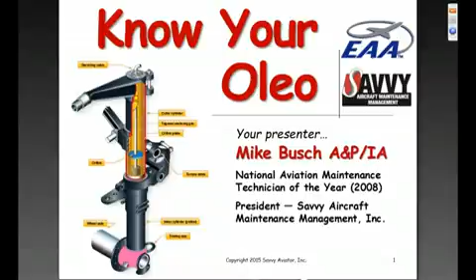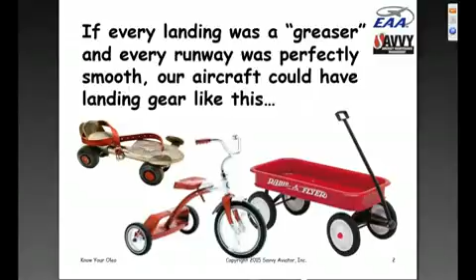So anyway, what we're going to be talking about tonight is landing gear. And if every one of our landings was a greaser that just barely kissed the runway, and if every runway that we landed on was billiard table smooth, then landing gear would be really simple. Our aircraft could have landing gear like a little red wagon, a pair of roller skates, or a tricycle. But in the real world runways aren't always pool table smooth, and some of our landings are a bit on the firm side.

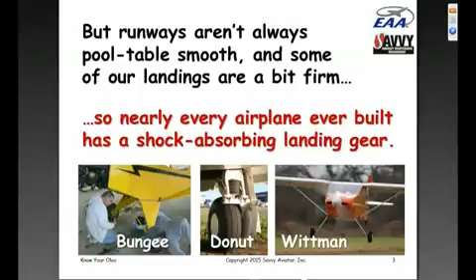So nearly every airplane ever built has a shock-absorbing landing gear of some kind or another, and there are a number of different designs for shock-absorbing landing gears for airplanes. Lightweight airplanes often can get away with a simple bungee cord shock absorber like this J3 Cub, where it's got landing gear legs that hinge and elastic shock cords to absorb the impact of landing. Very simple scheme, and it works pretty well for very small, very light aircraft.

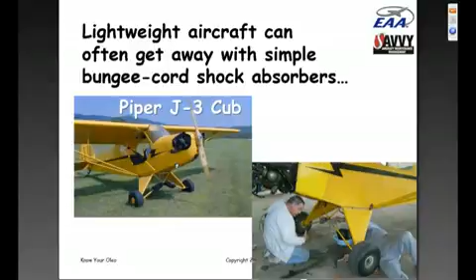Getting a little bit bigger, where the bungee cords are pushing their limit, a number of aircraft including this Mooney - and actually the nose gear of some other aircraft like a Cirrus - use a stack of rubber donuts to perform pretty much the same function that the bungee cords do. Again, it's a spring that absorbs landing impact.

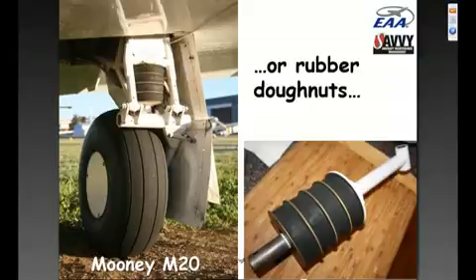Another design is the Wittman gear that was developed by air racer Steve Wittman, well known to all EAA members. It was developed by him in the 1930s and actually licensed by Cessna. Wittman patented this gear design, and Cessna licensed it in the 40s, and has basically used Wittman spring steel gear legs on pretty much every single engine airplane they've ever built, if we don't include the new Cessna 400, which is really a Columbia with a Cessna logo on it.

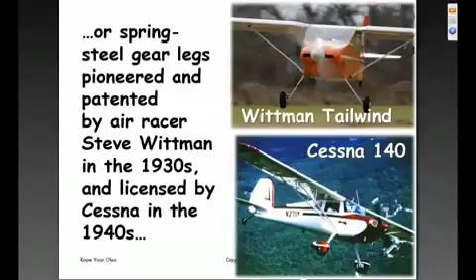At any rate, this is a very simple landing gear design that is based on a spring, and in this case the landing gear leg itself is the spring that absorbs landing impact. And even if we look at a modern design aircraft like the Cirrus SR-22, the main gear of the SR-22 is basically a Wittman gear, except that the leg, instead of being made out of spring steel, is made out of composite. But the principle is exactly the same.

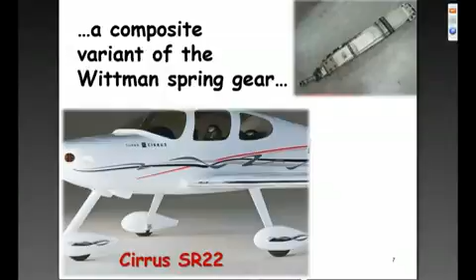Now all of these simple springy gear designs, if I can call them that, have some compelling advantages. They're cheap, they're lightweight, they don't have very many parts, and for all intents and purposes they're maintenance-free. Not completely - the bungee-style gears occasionally need the bungee cords replaced, rubber donut gears occasionally have the donuts replaced - but the Wittman gear pretty much is totally maintenance-free.

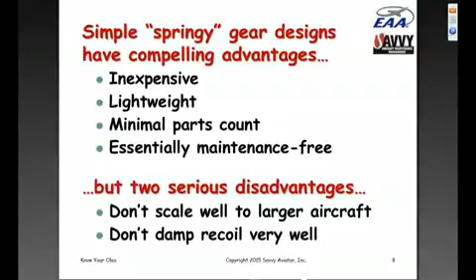But these springy gear designs have two serious disadvantages. First of all, they don't scale well to larger aircraft - if the aircraft gets big enough, the size of the springs needed to absorb the landing impact gets impractically large and heavy. Second, and probably most important, springy gears are springy - they don't damp recoil very well. So with a springy gear design, the harder the landing, the more energy the gear spring absorbs, and the more energetic the recoil. The result is that unless you make a nice smooth landing with a springy gear, you're likely to bounce right back up into the air.

And we know what happens when that happens. At best we have a multiple landing attempt on a single roll, and frequently we wind up with pilot-induced oscillations that sometimes can cause loss of control or damage to the aircraft.

An example of this, if you want to look way back, is the New York to Paris Ryan airplane that Charles Lindbergh flew. This airplane was a Ryan M2 mail plane modified so it could lift 450 gallons of fuel and have a maximum gross takeoff weight of 5,250 pounds, about twice what the normal Ryan M2 mail plane could handle.

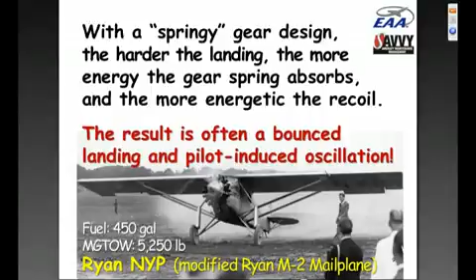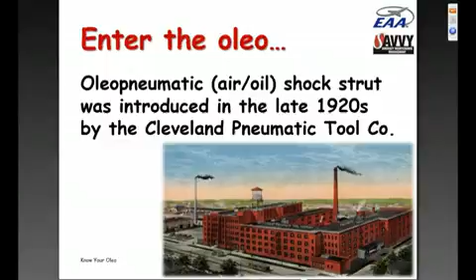The solution to this problem was introduced in the late 20s by a company called the Cleveland Pneumatic Tool Company, a company that nowadays is Cleveland Wheel and Brake. What they introduced is what was called the Oleo pneumatic, or air oil shock strut. They introduced it under the trade name Aerol, which I guess is short for air and oil.

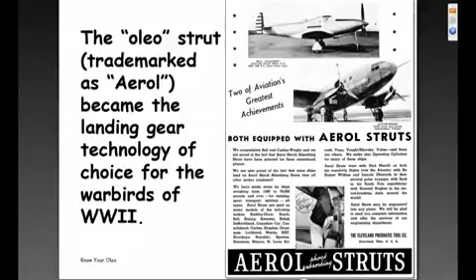It had significant advantages over these simple spring-style gears and quickly caught on during the 30s, and by the time the 40s came around and we got into the business of building all these warbirds, the Oleo pneumatic strut, or Oleo for short, became the landing gear design of choice for the warbirds of World War II. It's been used ever since on airplanes of all sorts of different sizes.

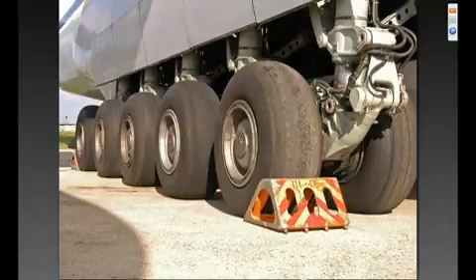At any rate, let's talk about how these Oleos work, because they're actually pretty clever in design. The basic idea is that instead of a mechanical spring or elastomeric spring, the Oleo uses compressed gas as its spring. It basically consists of a pair of telescoping tubes that create a variable displacement cylinder and are partially filled with hydraulic fluid and partially filled with gas, typically either compressed air or compressed nitrogen.

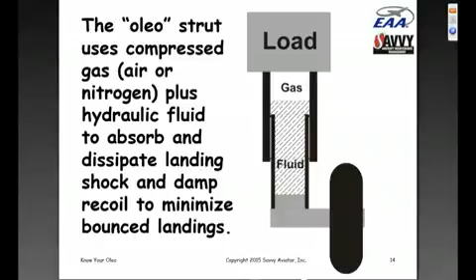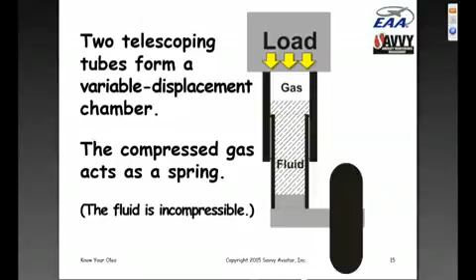These two telescoping tubes create a variable displacement chamber where the gas is acting as a spring. The fluid is incompressible. So as the strut during landing goes from fully extended to fully compressed, the volume of the fluid stays the same, but the volume of the gas gets less and less, and the pressure of the gas gets higher and higher. So essentially you're compressing this gaseous spring.

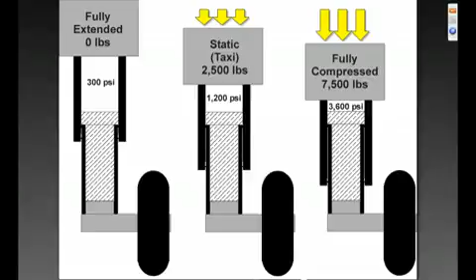So anyway, keep in mind that we're going to be looking at the state of this strut in these three positions: fully extended, where there's no weight on the wheels; static weight, which is basically the weight of the aircraft on the wheel, just as if you were taxiing around; and fully compressed, which is what happens on impact on a hard landing—the maximum weight that the strut is designed to carry.

So we talked about how the function of the air, or the nitrogen gas part of the strut, is basically a spring. But the secret of the Oleo is in the oil part, the hydraulic fluid. The purpose of the fluid in the strut is to damp the action of the spring, slow the rate at which the strut absorbs landing shock, and reduce post-impact recoil. By damping the action of the strut, something simple spring landing gear designs can't do, the Oleo minimizes the chance of a bounced landing.

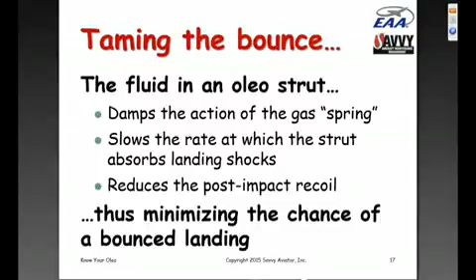Now, in order to do this, the Oleo has a fairly clever design. In the fluid chamber, there is an orifice plate, basically a disc with a calibrated hole in the middle. When the strut compresses, the fluid in the lower part of the strut is forced to move through this orifice into the upper part above the orifice plate. Conversely, when the strut extends again, the fluid is forced to go the other way, down through the orifice into the lower part of the strut.

And the size of that orifice controls how much damping there is in the action of the strut. The smaller the orifice through which the fluid has to pass, the stiffer the strut and the more reluctant it is to move.

Now, inside the hole in the orifice plate is a tapered metering pin whose diameter continuously changes, so that the pin is skinny and the orifice is large when the strut is fully extended. As the strut compresses and the metering pin moves further through the orifice plate, the size of the resulting orifice gets smaller and smaller, restricting the motion of the fluid more and more, until with the strut fully compressed, the orifice is essentially almost all the way shut.

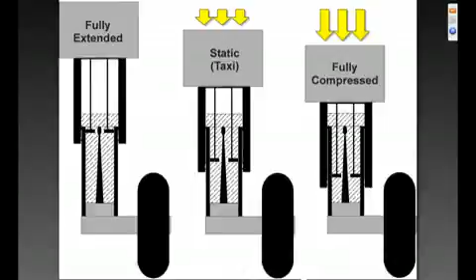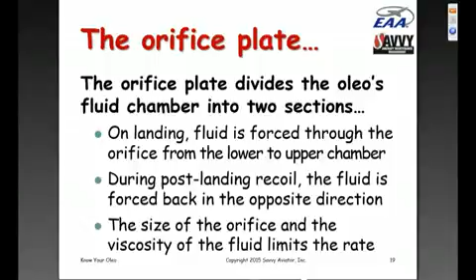So the orifice plate divides the Oleo's fluid chamber into two sections. On landing, the fluid is forced from the lower section up through the orifice to the upper section. During recoil, the fluid is forced back in the opposite direction. And the smaller the orifice, the stiffer the strut and the greater the action of the strut is damped.

Okay, so I think we've gone over all of this. What happens is that when you come in for a landing and you start off with a fully extended strut, the metering pin is skinny, the orifice is pretty big, and so the strut starts off very soft. Then as the strut compresses more and more, and a larger diameter portion of the metering pin is in the orifice, the strut gets increasingly stiff and damps the action more and more.

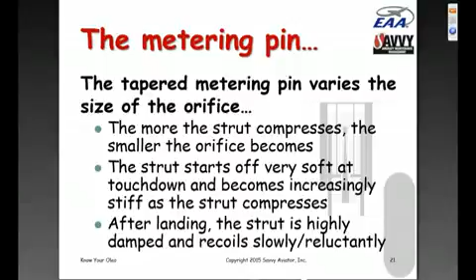And then if the landing is hard and the strut wants to recoil, in its compressed state it's highly damped, so the recoil is very slow. As the strut extends again, it gets less and less stiff. So it's really a pretty clever system.

Now, let's talk about how one would design an Oleo. It's kind of interesting, and it helps you understand the principles involved. Some of you may be home builders who might be interested in designing an Oleo. Most of you probably aren't — you either have an airplane with one of these struts, or you'd buy a commercial one and leave the design to somebody else. But it's interesting to go through the basic guidelines of how you'd design one, because it helps you understand how they work a little better.

So let's take, for example, the main struts for my airplane, a Cessna 310, which weighs about 5,500 pounds maximum gross takeoff weight, just a little heavier than Lindbergh's airplane. Because the airplane is 5,500 pounds and it's a tricycle gear airplane, each main strut needs to support a little less than half the weight, roughly 2,500 pounds, with the nose gear supporting about 500 pounds, and the remaining 5,000 pounds split between the two mains. So each main needs to support about 2,500 pounds — that's with the airplane static, just sitting on its wheels or taxiing around.

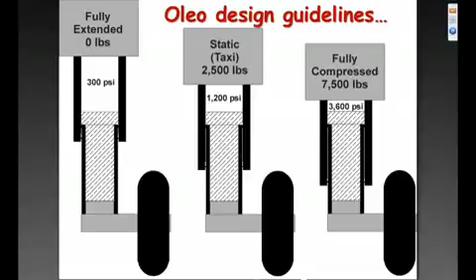This particular design I'm showing you here, the strut on my Cessna 310, clearly meets all those constraints. The minimum pressure is well over 50 or 60 psi. The maximum pressure is well under 6,000. And the static pressure is well under 1,800. So it meets all of those design criteria.

The main gear strut on my Cessna 310, when the airplane's up on jacks or when it's flying, extends to about 12 inches in length. So if there's a 4-to-1 compression ratio, which is our design goal going from unloaded to static, then the strut should compress to about 3 inches when the airplane's weight is on the wheels.

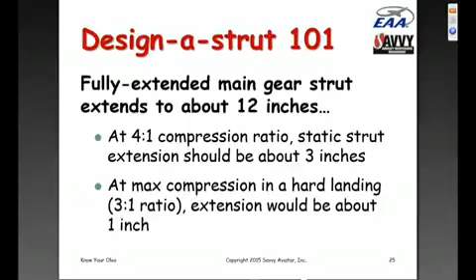And under a maximal hard landing, where the compression ratio is another 3-to-1 from static to maximum compression, the strut would compress all the way down to about 1 inch at the maximum impact it would handle in a maximally hard landing, which is a 3G impact, a 600 foot per minute descent right into the runway.

Nose gear handles much less weight. It has a shorter throw, much lower working pressures. In my airplane, the max nose strut extension is only about 6 inches, about half as long as the main struts. The unloaded pressure is right down at the minimum, about 50 psi. Static pressure is about 200 psi, and the strut at 200 psi is extended to about 1.5 inches, about a 4-to-1 ratio again.

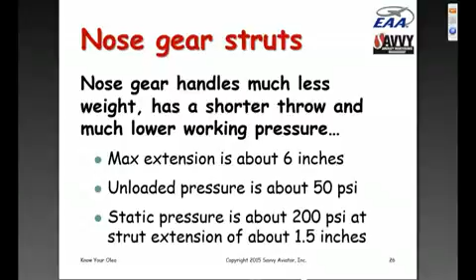But although the nose gear handles a lot less weight and is much less beefy, its ability to damp recoil is even more important, because in a tricycle gear airplane, the recoil of the nose gear is really a bad thing.

If you land the airplane hard and the nose gear recoils, it pitches the nose up, increases the wing angle of attack, and makes the airplane want to go fly again. And of course, we know what happens when that happens: the airplane is back in the air. The pilot is trying to recover the botched landing, and this can easily lead to PIO, pitch divergences, that have frequently resulted in wrinkled firewalls and curled prop tips and other expensive things.

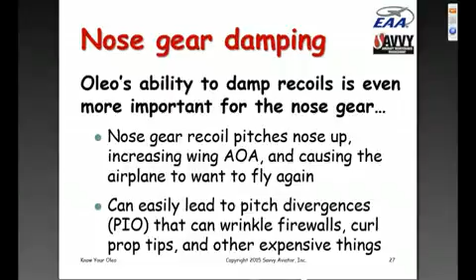So the ability to damp recoil on nose gears is particularly important, and that's why, for example, when Cessna designed its first tricycle gear single, which I guess was the 172, it decided, although it was going to use a simple spring Wittman-style gear for the main gear, it opted to use an Oleo for the nose gear, so that it would damp out the nose gear recoil. And Cessna has used that same design ever since, with a Wittman-style springy gear for the mains, but a nice, well-damped Oleo strut for the nose wheel to minimize botched landings.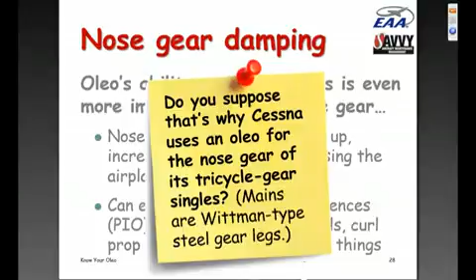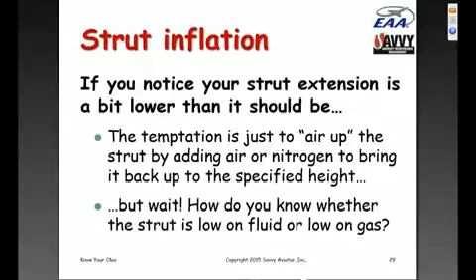Now let's talk a little bit about maintaining these things. Let's suppose you notice that your Oleo strut extension is a little lower than it's supposed to be. The temptation is to just air up the strut by adding air or nitrogen to bring it back up to the specified height. But before you do that, you want to think for a minute, because a strut that is low could be low either because it doesn't have enough gas pressure in it, or because it doesn't have enough fluid in it. So how do you know whether the strut is low on fluid or low on gas?

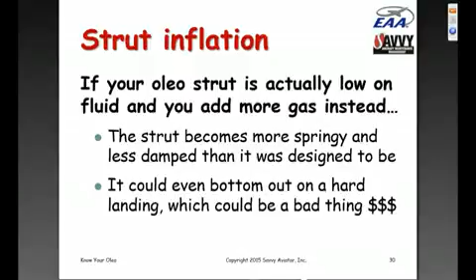If your strut is actually low on fluid, and instead you add more gas, basically you make the strut more springy and less damped than it was designed to be. And if you do that enough times, ultimately the strut could wind up just bottoming out on a hard landing, which would be a very bad thing. It could cause serious damage to the airplane. So we want to think about this a little bit.

How do you tell whether an Oleo strut that's low needs more air or more oil? Well, the quickest and dirtiest way to figure that out is to rock the airplane. If it's a main gear, rock the wingtip up and down. If it's the nose strut you're looking at, rock the prop up and down, and watch to see what the strut does. If the strut seems excessively bouncy, then it probably needs fluid, because remember, the purpose of the fluid is to damp the action of the strut and to prevent it from being bouncy. On the other hand, if the strut seems stiff and reasonably well damped when you try to bounce it up and down, then all it probably needs is some more air or nitrogen.

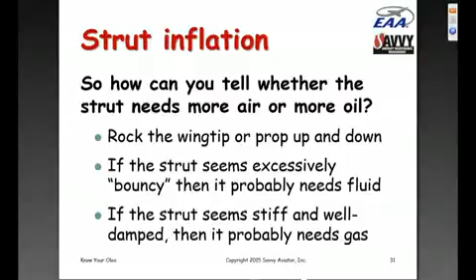So before you just blindly add gas to an Oleo strut, try the bounce test and verify in your mind whether the reason the strut is low is because it doesn't have enough gas in it or because it doesn't have enough fluid. Once again, the gas is the spring and the fluid is the damper. And if you understand that, it's usually pretty easy to figure out what the strut needs.

Finally, if your Oleo strut starts leaking fluid and you start seeing streaks of hydraulic fluid leaking out on the polished part of the strut, typically these struts use 5606 hydraulic fluid, which is sort of a red sticky stuff. Before you let a mechanic tear the strut apart to reseal it, try adding a bottle of some magic potion called Granville Strut Seal, which you can buy at Aircraft Spruce or other aircraft parts distributors. And Granville Strut Seal is something that's been around for, wow, many, many decades.

And it's a magic potion that you add to these struts that cause the seals, the O-rings and stuff, to soften and to swell a bit. And over a period of many decades, I've had an almost perfect batting average of fixing up leaky struts with Granville Strut Seal and not having to pull them apart and change the seals. If the Granville doesn't solve the problem, then you will have to have the strut disassembled and the seals replaced.

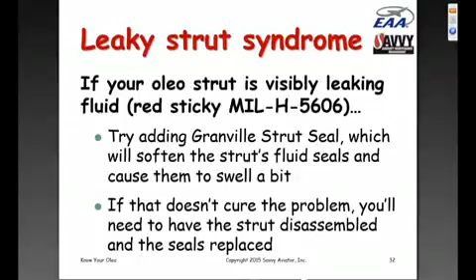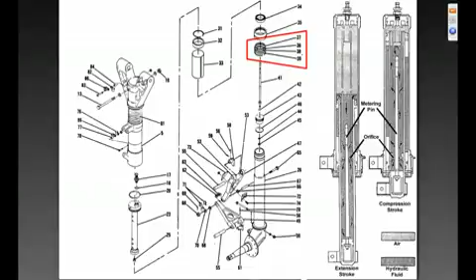Again, it's a few hours labor to reseal a strut, and before you do it, my recommendation is to try a little bit of this Granville Strut Seal. You simply let the gas out of the strut, put the Granville in through the filler valve, and then air the strut back up to its proper extension. I've had terrific luck with Granville Strut Seal eliminating strut leaks without having to disassemble the strut and replace all the seals.

Anyway, Tim, that's all the prepared stuff I have. We can open it up for questions if you like.

Okay Mike, great, thank you. Very interesting presentation, on a very geeky subject. Yeah, actually it was riveting though. I really liked it, it was good stuff. You don't often get to talk about this. You must rivet easily, Tim. What can I say? I'm easy.

Okay, let's get into our questions here. We got some questions that have already come in. DW just wanted to say that he has used the Granville strut seal, and he says it's a miracle in a bottle. Yes, it is, and there aren't many of those around, but it really works well.

So, question here from Gary. He's just wondering, do you put in nitrogen or air? Well, nitrogen is always better, both in Oleo struts and in tires and so on. Basically, nitrogen is just air with the oxygen removed, and because oxygen is corrosive, I mean it's the very definition of corrosive, it's always better to use nitrogen if you can.

Now, for large aircraft or really high performance airplanes like business jets and so on, or large aircraft over 12,500 pounds, typically they will specify specifically that you have to use nitrogen. And the reason is that for large or very high performance aircraft, the gas in the strut heats up so much during landing impact that if there was oxygen in the strut, there is a possibility that the hydraulic fluid could ignite. By using nitrogen and making sure there's no oxidizer in the strut, the fluid can't possibly ignite. For smaller airplanes like the one I fly, or the one most of you guys probably fly, your choice of air or nitrogen are permitted.